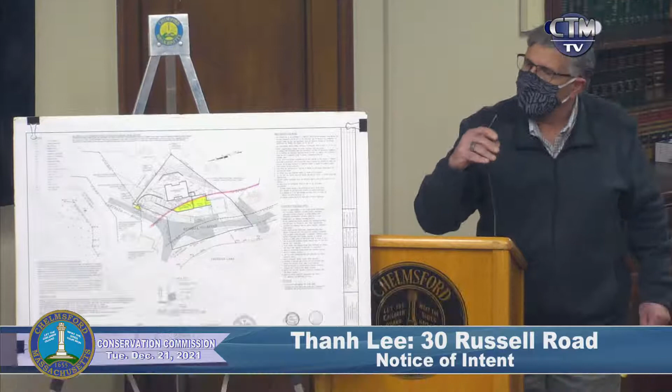Good evening, Mr. Chairman and Commissioners. My name is Hushman Afshar from Taj Engineering LLC. As it was pointed out, the heavy line is the property line. As you can see, a good portion of Russell Road lies within the property of the applicant, and the entire site is disturbed in the sense that the existing house is between the 50

Anyone in the audience need a copy of the plans?

and 100-foot buffer zone. The highlighted yellow area is the only area of the proposed improvements on the property that lies within the 100-foot buffer. As you can see, the pink line is the 100-foot buffer, and that about 1,000 square foot is actually within the 100-foot buffer line.

This is the house, this is the garage, this is the breezeway, and this is the driveway. We are proposing an underground leaching chamber, retention and infiltration, right here at the end of the driveway. There is a trench drain right here that collects any surface runoff from the driveway. And there is another system right here in front of the garage in the paved apron that collects the roof drains, and these systems are retention infiltration systems.

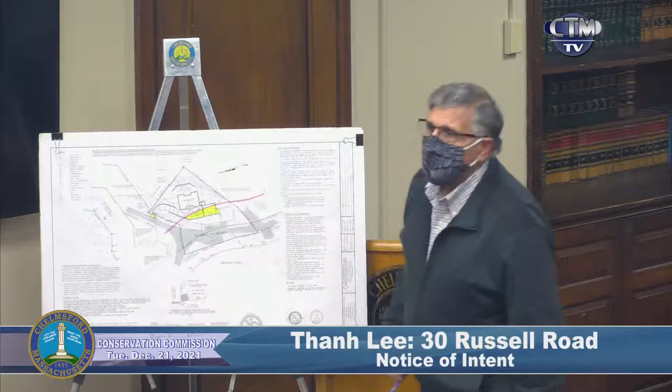Okay. And as you can see, the direction of the flow is towards the applicant's property. It's deviated from the abutter, in this direction. Well, in that same general area, the way the contour is shown, there's a swale, the little U-shaped outline of the contour. Correct, it comes here, but then this contour is coming this way. Right now, the existing contours are in this direction, as you can see in the background. This way, it's going uphill. The way I'm looking at it, it looks like it's downhill, so you may just want to reevaluate that and take a closer look at that.

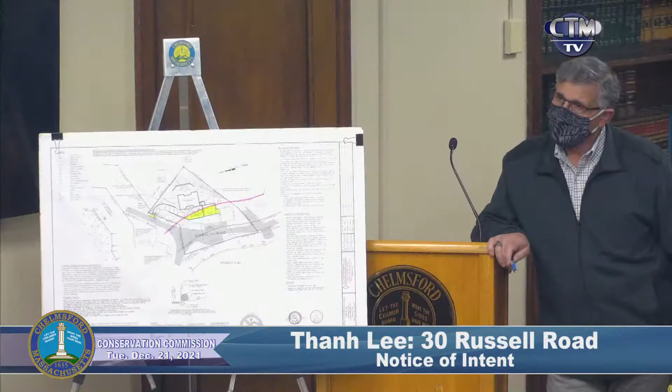And then I would also have some concerns over the actual retaining wall. It looks like it's a two-tiered retaining wall. Are you talking about the proposed one or the ones that? The retaining walls in the front. Not the one that's on site? No. Well, it looks like there's an existing, maybe a stone wall along the front, and then there's a proposed one behind that. You're talking about the new ones? I would be concerned with both of them. Okay.

Just so we can know for next time, what would be the concern about the retaining wall? I would just be concerned about the actual structural ability of that retaining wall to function. You mean the ones within the buffer zone? Just all the retaining walls on site. My experience is that if you have a retaining wall that's close to another retaining wall, there's potential for that to have an impact on that existing wall.

So just from a structural point of view, I would be concerned. I'm sure that the building department would require the stamped plans, properly structurally designed, which has to happen. Otherwise, the applicant will not get his construction permit. Anything else, Chris? I think that's all I have for now. All right, very good. Moving along.

Mr. McLaughlin? In the letter you read, Chris, the authors of the letter said there's activity happening on the site presently, is that correct? I think they said that in the letter. Are they here tonight by any chance? Yeah, it's referring to the retaining wall he put up. Hold on, Dave, let's keep this under control. What's your name and address, please? My name's Emily Madden, I'm at 16 Russell Road. Okay, good. So is there activity on the site presently? Not right now. I'm sorry if that was written. Okay, thank you.

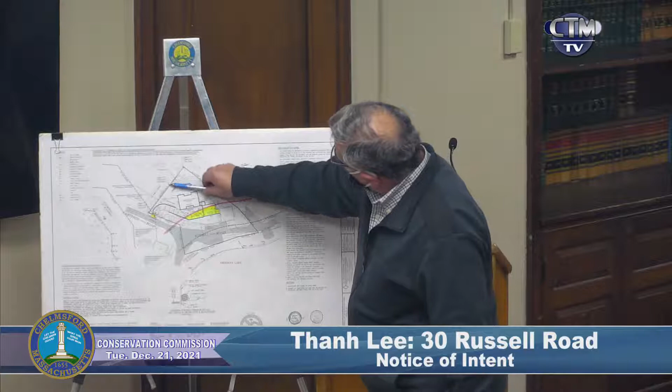The existing runoff comes just down the hill as it is. Once the house is built, where is the runoff going to go? From behind the house, anything behind this proposed retaining wall, part of it comes through the soil, and part of it comes over the wall onto the driveway into this leaching chamber. So none or very little of it is going into the chambers? Well, this part is going into the chamber, yes, and this part remains as it is right now. All right, during construction, how are you going to prevent erosion back there?

Well, you're proposing the conventional erosion control. I read your erosion control, but it didn't address to my satisfaction how you are going to prevent what could possibly be significant erosion during construction behind the house. And I don't know where that runoff is going to go. You said it was going to go to those two chambers. I'm not so sure it will.

Well, it's going to go from the roof, from this backyard; all the roofs are going here, and the rest of it follows the pre-construction flow pattern. During the construction, we have silt fence all around. Have you made any calculations as to how much runoff from that site will go into those two chambers? Yes, we have. Are they in your package? They're not in the package, no. Could we see them? Yes.

Okay. Mr. Chairman, if I may. Yes, Chris. I think what Dave is saying, and correct me if I'm wrong, Dave, is during construction, the back of the area will be graded, so there'll be construction equipment, and they'll be regrading the slope, so there'll be disturbed soil. What happens if there's a rain event and the slope starts failing, or gets inundated with rainwater?

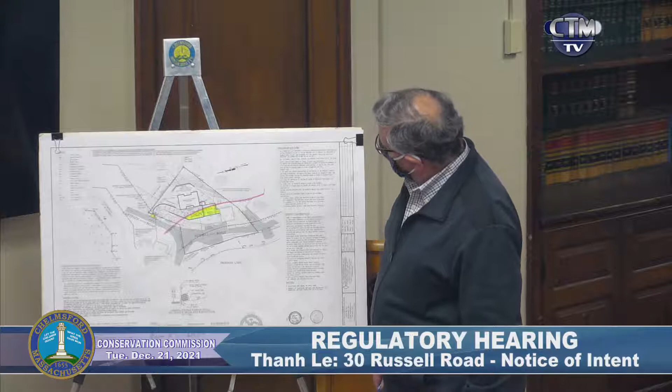There's going to be some runoff that goes to the northwest, and that's the wetlands that we've had some concern about over the years. That's the wetlands behind Russell. It's not Freeman Lake. You mean this one here, yeah. And Carpath, as I understand it, is not an accepted street and does not have storm drains in the street. Is that correct? I don't believe so. Russell is not an accepted street, and it does not have storm drains either. Correct. So the only runoff from this site being collected is in those two chambers. Everything else is either going to flow over Carpath or onto Russell.

Is that correct? That's what's happening right now. We are improving the situation. That doesn't mean it's okay, just because it's happening now. I'm trying to understand how significantly better this project is going to make that neighborhood. That's what I want to understand. I'm not hearing it yet, that's all. That's all I had right now, Chris. All right, Dave.

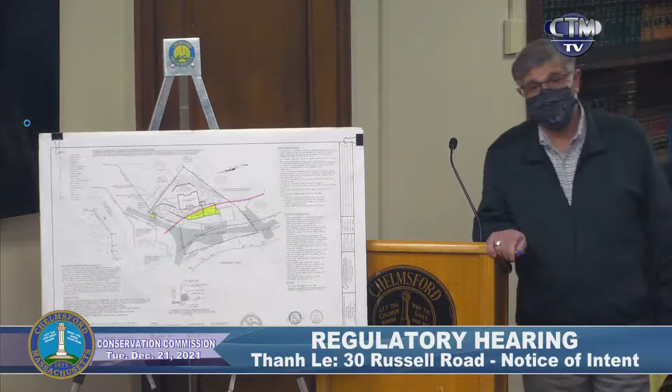Moving on. Bill? Yeah, I agree with Chris about the test pit for that driveway drain. Also, I had a question. This Russell Road is on the property, right? It cuts through this property. Yes. Now, is there any intention to remove any of the hot top that's within the 30-foot no impervious? There's a little area of an apron down by the water. No. You have no intention to remove any of that?

Down at the bottom, the little apron? You mean here? Right there. See where the apron goes down towards the water? Yeah, no. We are not touching any existing pavement. So the hot top's going to remain within the 30 feet? Yeah, I don't think we can unless we go through all kinds of process with DPW. But right now, to the best of my knowledge, there is no intention to touch any of the existing pavement.

Does the town plow that, or who plows that? Town plows the right of way, but not that little parking area. But, Bill, we'd be happy to remove that bump out.

And I was just asking the question. You know, if the commission would like us to take that out and put some landscaping there and create some less impervious soil as part of this project, we'd be happy to do that. Okay. And I also agree, because you're going to be doing work behind the house.

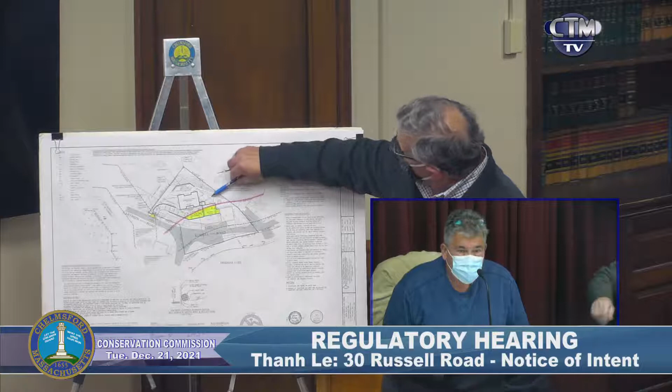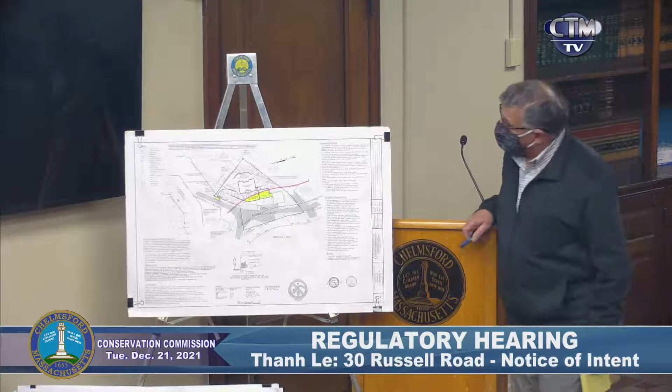We can put another underground system here, if the commission so desires, that's fine. The idea was to continue the swale, come through these few feet, and join the existing contours that go this way. There is some sort of swale here, as you can see from the contours. We can either continue that, or we can put another system here. That's fine, do what you have to remedy it, we're not here to design. No, we will. But that was the intent, to bring the swale along and down to where it goes right now. But it hasn't been addressed until we just now addressed it.

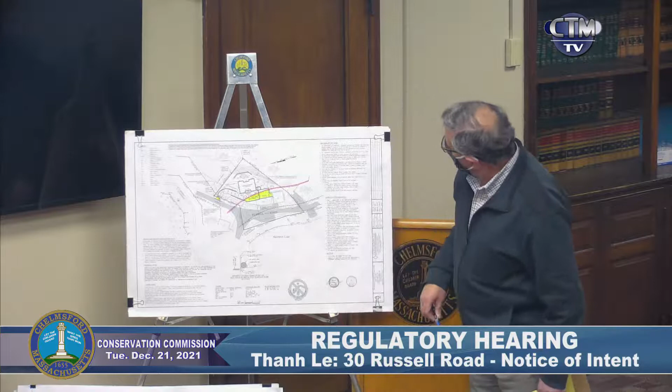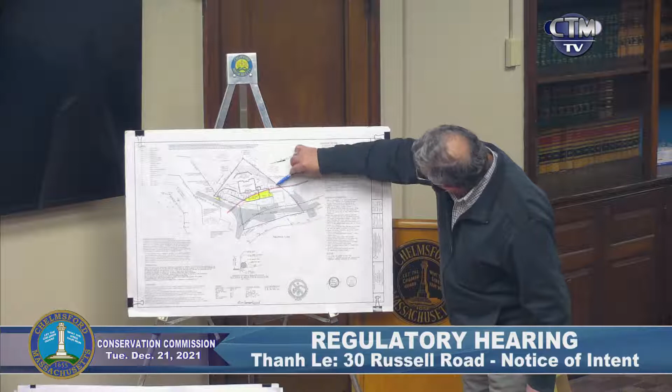Well, these contours come this way and down, and this is existing swale. So once it passes through this corner, it gets back into this swale. I'm all set, thank you.

Thanks, Mark. Carl? The only thing I'm trying to remember is when we talked last time, we talked about trees. Were the trees removed already on this site? There was one dead tree within the 100-foot buffer that was removed, I think, in 2018. Okay, and are any more planned to be removed within the 100-foot buffer? No. I think we've covered everything. Thanks, Carl. All right, John?

These retaining walls, what are they gonna be built with? Are they gonna be built like the front retaining wall, which is boulders, or a regular system? They will be designed as cast-in-place concrete or landscape block retaining walls. Landscape block, which is designed for retaining walls. They go up to like 50. Oh, I know how high they go up. So either or, but it will not be a stone wall, no.

So mud and stuff like that isn't gonna be able to get through. No. And you're sure these retaining walls are gonna be enough to hold back everything? They will be, yes, they will be designed accordingly, just like any other retaining wall. Yeah, okay.

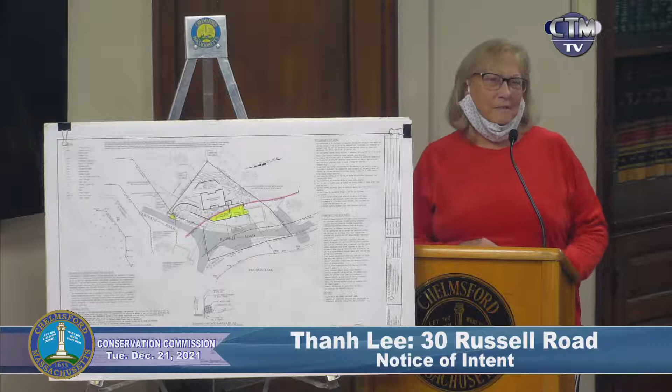So I just wanted to make sure that you've all been out there and see our situation. You need to see the bigger picture. It's not just that one lot. It's our quality of life. That's all. Thank you. Thank you, Ms. Clancy. Anyone else wish to ask questions of the applicant or address the commission?

All right, well, today was our opening meeting for the commission. Does a member of the commission want to take some sort of action tonight for next steps? I think we asked the applicant to provide us with some additional information.

My primary concern with this proposal is I do not feel the applicant has adequately shown me how the runoff from that hill is going to be managed and contained during construction and post-construction. What I don't want, and it gets to what this lady just spoke to, is that street's in pretty bad shape, and this project should try to keep water off of Russell Road to the extent that it can. Certainly should not put more water onto it.

I'm also not quite sure, because it wasn't addressed, does the runoff go to the wetlands on the other side of Car Path? I think the question about the elevation of the chamber by the driveway is an important one. We don't want that chamber to be below the water level of Freeman Lake. So it'd be my recommendation that we give the applicant an opportunity to answer our questions.

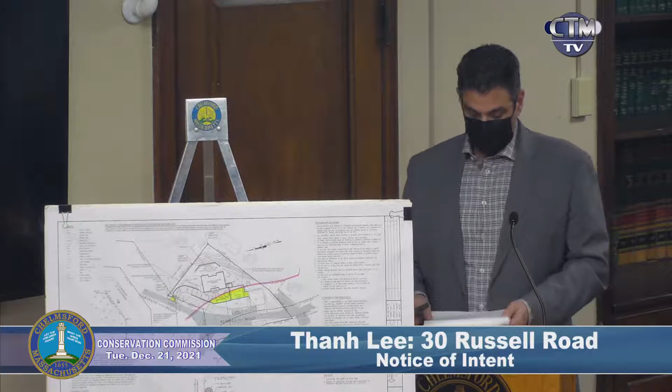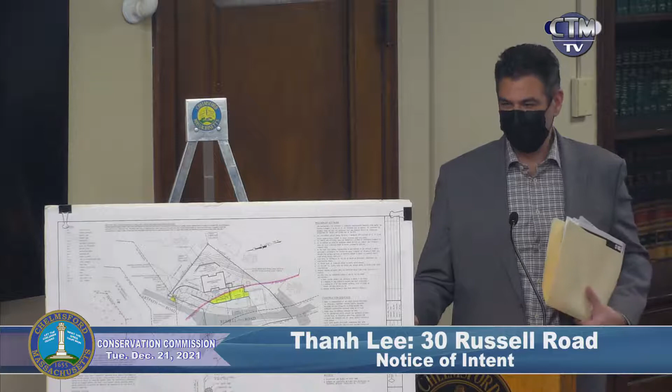Very good. So if I could have a motion then from the commission to continue. Mr. Iliopoulos, we're meeting January 4th and January 18th. I don't know if you have a preference on dates for getting that information? Yes, sir. Why don't we, if you wouldn't mind, could we go with the 4th? We'll see how much time we need to update the plans to get them to you with the holidays. If we need more time, we could always reach out and ask for a continuance to the 18th, if that would be all right. Exactly. Okay. I know it's a tough time of year, so maybe the 18th will be more realistic, but we'll try for the 4th for now.

All right, so could we have a motion to continue the hearing? I so move we continue this hearing until January 4th. Motion by Mr. McLaughlin, seconded. So it's moved and seconded, right? Well, yes, we just had Mark add the second on that. Okay. So just discussion on the motion, Mr. Chairman? Sure. What I can do, if the commission wants, is draft a proposed set of pre-construction conditions to address some of the concerns that we have. I think that's a great idea. It could be beneficial. I can have those ready for the commission's review at the next meeting.

Yeah, Bill? Is there any desire by the board to remove any of that hot top that's in that apron out front, or leave it the way it is? I thought that might be a good idea, is my off-the-cuff feeling. Except doesn't Russell Road go to another house? Yeah, but there's a couple of parts. We own part of Russell Road, but there's also an adjacent parking area that's between Russell Road and the pond, owned by the applicant. That cut out might help some of the runoff situation. Well, if it gets rid of some impervious material, yeah. It might help. We're happy to incorporate that into the plan. It's just my thoughts, I don't know if anybody else supports that, but I think it might help.

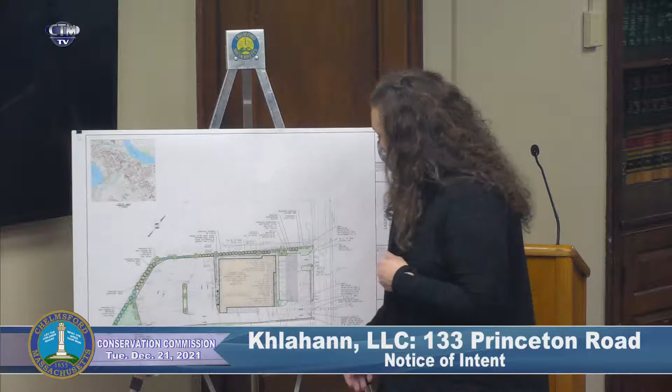So we had one review from the town engineer during planning board. We already have our planning board approval. We wanted to work with Christina and make sure that her drainage questions were answered before we filed with you. So we were able to take her letter, prepare a package that was submitted to this board and to her.

What we found out last week, and this might be a good thing for the commission to know, is that any kind of porous pavement requires a special permit from the planning board. So we had switched over to use kind of an LID measure, some porous pavement in the back here to accomplish some of our drainage solutions. We found out that we would have to completely go back to planning board and refile and re-notify so that we could use porous pavement. So we said forget it and switched it out and made it work without it.

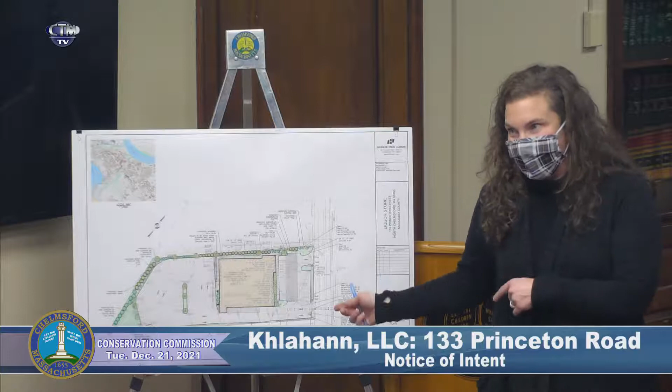They wouldn't give you an amendment? No, because it's a new special permit, we would have to re-advertise. That's ridiculous. I know. So that portion of the bylaw was just amended, but they didn't take out the special permit part. And I actually had never seen it in 25 years, and Christina and Evan weren't really sure. Christina found it, and Evan was like, well, I guess it's written down, so I guess you'd have to come back. So we made it work without that.

We sent in a new plan to Christina yesterday. I didn't see anything from her today. She had a bunch of meetings today. Were you able to talk to her, David, at all? No. Okay. I talked to her this morning. She was going to try to get to it.

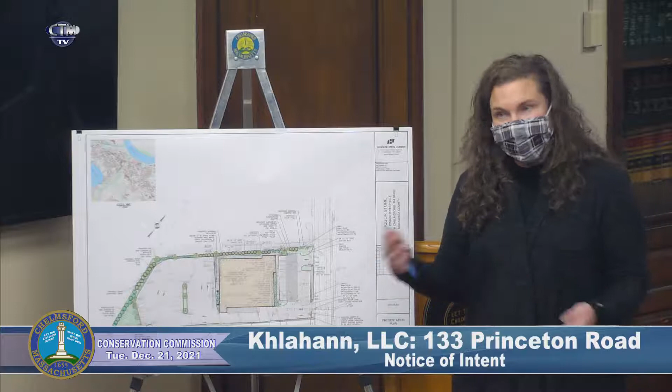None of it really had to do with the floodplain mitigation. That was all approved from her in her previous letter. We're just working out the final details to make sure with the new stormwater management for Chelmsford, we have to have 90% TSS removal and 60% total phosphorus removal. And we had that. We were just making some little tweaks here and there to make sure she's satisfied. So with that, that's a pretty quick overview. If you have any questions.

I know, David, you asked me about the 100-year flood. Before I close, I did find the profiles for Stony Brook. I have the floodplain map with me, I think it appears around 99, 99.5, which would just touch this back corner, which is super surprising based on what we saw when we were out there, that it would ever come up that high. But that's the profile that I could find for the flood insurance study that was done for Middlesex County. I couldn't find the section of Cold Springs Brook at all, so I don't know if this section was even studied. But I just wanted to.

Okay, well, thank you for checking on that. David and I did go out on Monday and walk the site also. Well, thanks, Katie. David, that kind of leads into your comments. I know you were out there. Can you give us a little bit of a report? Yes. So a couple of minor questions did occur to me after our site visit, Katie.

So this doesn't require a SWPPP, right? We would do one, yeah, because it's new construction that's over 40,000 square feet, so we would do a SWPPP for this. Oh, okay, so this is that large? Yeah. Wow. That includes the parking lot, right? Correct. Because the building's not that big.

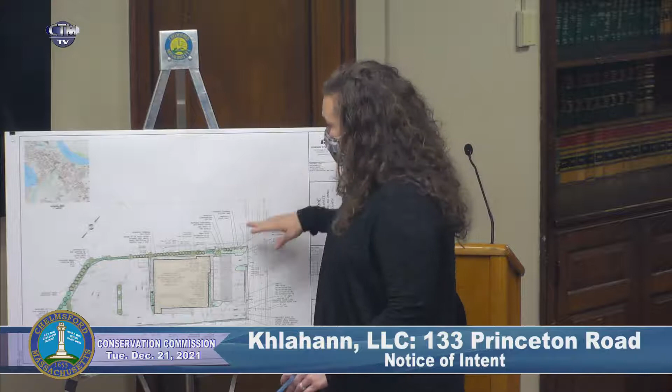And when I was just looking at the site, we usually have this really dark line around the entire area. It really is gonna need to be at the limit of work. Everything is pretty much downhill from us, so we will have to, and I can add that to the plan. Yes, if you would please do that. We did show it on the detail sheet, but we didn't show a location, but it would be essentially the entire property line at the limit.

Good. So are you awaiting further revised plans, or you're going to be preparing the revised plans? No, they're done and they're into Christina. Oh, okay. Based on her last comment letter, and we had responded to the comments and provided you with a copy of that yesterday when we were dropping them off to her at the same time. But you haven't submitted the final plans yet, correct? Oh, I think those were the final. I think those are the final plans.

Oh, okay, so the date on these is 12/20? Right. So these are the final plans? Mhm. Well, we hope so. Okay. Well, this is the third iteration with her. She probably wouldn't have any more questions, would she? I hope so. I was really hoping she would get to it today, but this week is really hard, so she hadn't.

I'd be happy if the commission were okay to have it as a condition of approval to make sure she's okay with it. She has to be okay with it before we print Mylars for the planning board. And there's certainly no more disturbance that we can do. So I personally don't see any reason at this point to keep the hearing open. Just my opinion. All right, good. Well, let's see if the commission has some questions.

Chris, anything? No, I think that Christina's looking at the pre and post and the drainage. I'm more than comfortable with that. You'd said that you provided floodplain calcs too, and she signed off on those. So I'm good. All right, excellent. Dave, anything? Where is the floodplain line?

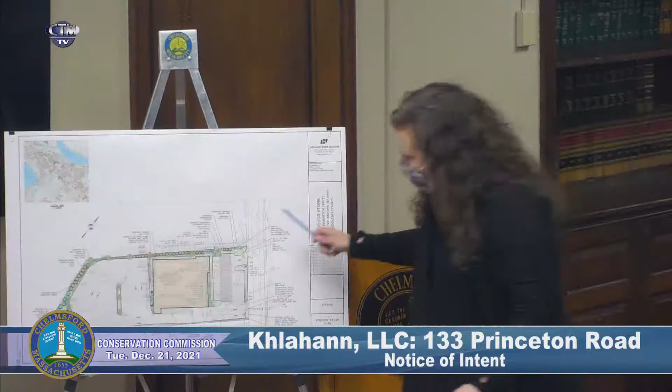So it runs through the 103 contour, which now basically does this. So it's a straight line through the back of the building? Well, no, it follows the building because the building's enclosed, so it can't get into the building. No, I understand, but if the building weren't there, where would the floodplain line be? It would go straight across. Yeah, that's what I want, okay. But you're reworking the 103 contour as part of the project. That's correct.

So, right, what we've done is given you the foot-by-foot volumes from pre to post, from I believe it's the 98 contour to the 103, so that you can see the volumes between each foot-to-foot interval to prove to you that we're keeping the same, or actually it's more volume in the post than the pre. So the 103 and essentially the floodplain elevation is moving closer to the road, right? Only on our site in this section here, because we had to fill this side a little bit.

And the building's a little bit wider than the existing building that's there today, footprint wise. So we manipulated, which we have to do now because you can't use structural measures to provide flood volume storage. So you basically have to manipulate the ground to get your flood storage. So that's what we did within our site. And that confused me at first. It's a little bit unusual.

Good. Dave, anything more? In the erosion control plan, you make a reference to the disturbed material that's going to be removed. How will disturbed material be deemed unsuitable? I don't know what unsuitable material is. Well, it depends what you're using it for. There's some unsuitable material in the front here above the natural grade that was filled. That material will most likely be unsuitable for the parking lot. So it's end use, not in absolute terms, unsuitable? That's correct. Like under the building too. What's the demolition plan?

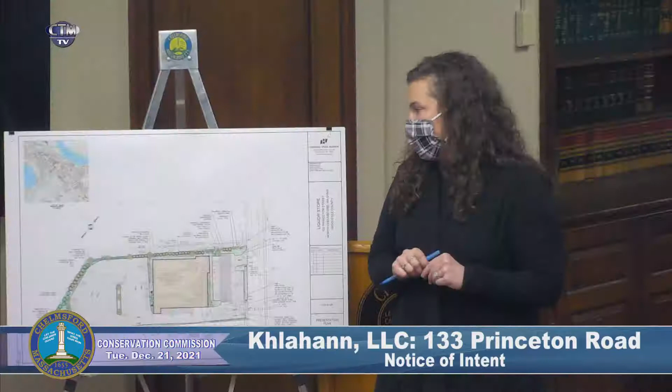You've got a substantial amount of landscaping on this site, and there's a list of trees that are 2.5 to 3 inches when you plant them. How big do those trees grow? Do they end up being 20-footers or 30-footers? Anybody know? What's the species? There's an Acer maple, they can be small or big. There are so many hybrids now. I can tell you that Nancy Arroway reviewed it and went back and forth with our landscape architect as to the appropriateness and the size of each of the plants on the drawing.

Where I'm coming from, Katie, is you're removing 8 trees, which are probably lousy trees, from the site. I'd like to see good trees replace them, to have the same, if not a better, impact on the atmosphere, and that's a function of how big a tree grows as much as any. I don't know off the top of my head, but I can tell you the species. That's okay. I wouldn't propose any hemlocks or Norway maples. Those aren't allowed anymore.

In one of Christina's first or second letters to you, she refers to ponds on the site. What is she referring to? Here and here. Are they literally ponds of water that exist year-round? No, this is an infiltration pond. So she's not referring to the natural site condition. No, this we had in HydroCAD as a swale, and she wanted it modeled as a pond.

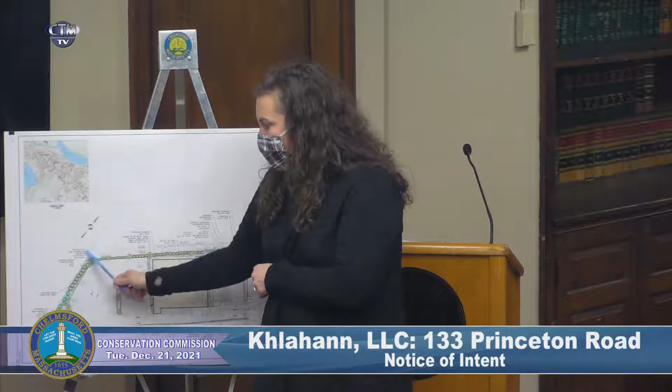It's outside of the water table, and this doesn't, well, it can infiltrate, but it's not called an infiltration practice because it's too close to the property line. And so all the drainage from the site is going to where? The building in the front goes to here, underneath, and then the pavement from basically here along the side of the building, and this pavement goes into these two practices.

Where's the water table in the cellar? How fast do you hit water, do you know? Well, we tested back here, and it was about 26 inches, I believe. Okay, but you're having a full cellar in the building? Full cellar in the building, but it basically is at that elevation, about a foot to 2 feet below grade.

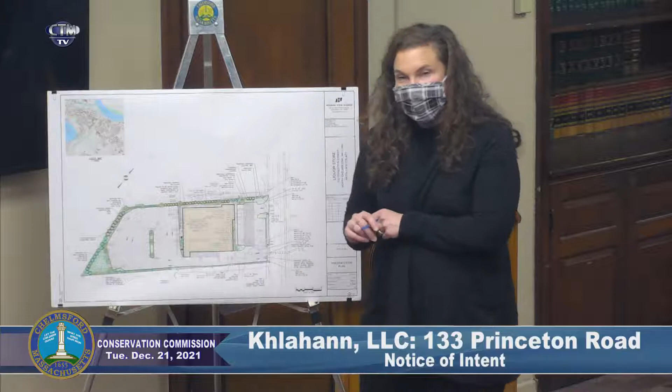One last question, I'm sorry. DPW said they didn't want sidewalks. Right, the Vinal Square Committee did. And why did DPW not want a sidewalk? MassDOT's gonna require us to put sidewalks. It's not a conservation question. I know. DPW, the thought process was that they'd take the money and put sidewalks somewhere where they're more needed. But the Vinal Square Committee came back and said, no, we want sidewalks. And MassDOT's not gonna let us get away without putting in sidewalks. Good. So the sidewalk's back. That's all I had, Chris. Good, I'm glad the sidewalk's back.

Bill? Do you have dewatering when you do that cellar? I don't have a dewatering plan, but we would include that in the SWPPP. That's gonna be a big improvement for what's there. Oh, yeah. Anything is. No, that was the only question I had, about dewatering when you did the cellar.

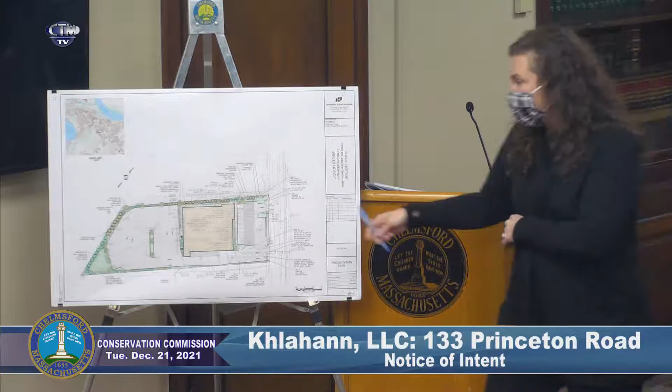So you're saying, Katie, it's more of a crawl space, this cellar? No, it is a full cellar, but basically it's gonna be half buried in the back, so that the floodwaters can't get into the building. Oh, okay. But you're still gonna have to dewater, so you need a plan. There'll probably need to be some sort of dewatering, absolutely, for the footings. But we'll include that in the SWPPP. Okay. Very good. Good, Mark?

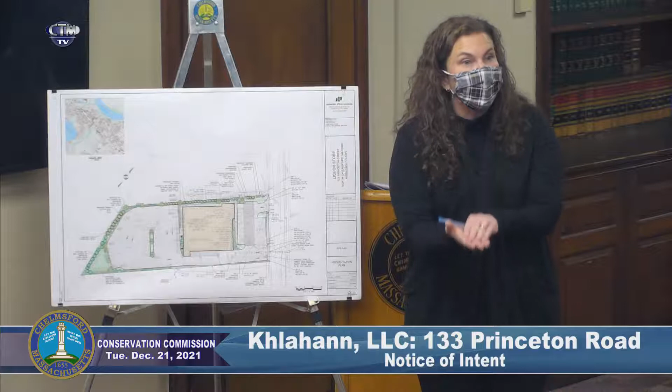I'm still confused about this whole area. This site is probably 95% impervious. Fair number, 93, 95. But you're taking floodplain area and paving it. We're not replicating anything. We're replicating the volume, which is what's required. We're providing actually more volume than exists there today within the floodplain. So when the lot floods, it has more storage on the lot than the existing condition. And that's all done on the railroad property? No, it's here. It's paved, isn't it? Yeah, but it's volume. It has to do with elevations. It does not have to do with pervious, impervious.

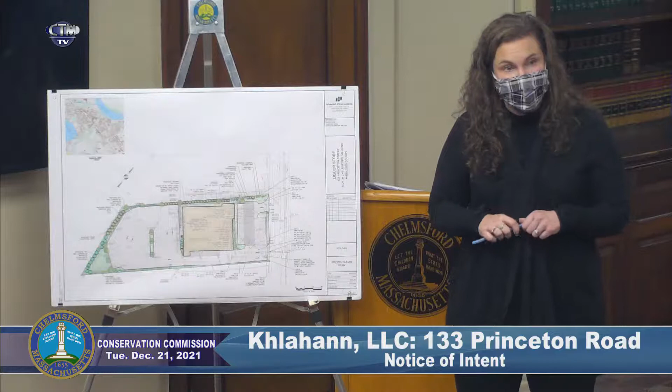You had to cut and fill different areas? That's correct. And what we're doing is we're taking the infiltration that happens in the back now, and we're putting all the water into the ground up here, where it's further away from the water table. So there's also increased infiltration on the site over the existing condition too. It is standard practice. Okay. But it is a little confusing if you're not used to seeing it, yeah.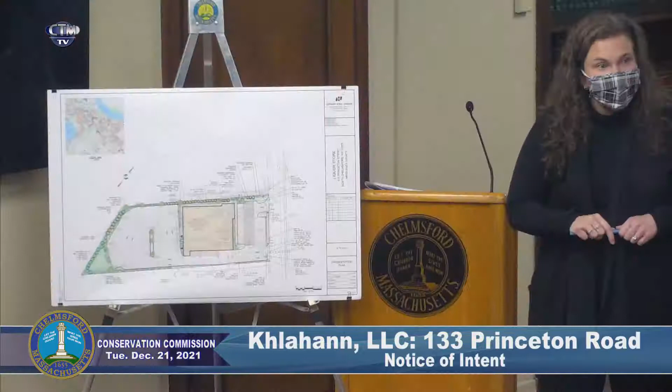I guess the other thing is, we really encourage trees. Really put a lot of emphasis on that. Anything they can add to this, I'd like to see. And native, if we could. I can double check on the native, but as you can see, we've put plants every possible place we can. There's a ton of shrubs on it. Maybe you could put some trees instead of shrubs, anywhere where they could fit. That whole side is chock full of trees. These are all trees, there's trees here in the center island. That would be really nice. We'll do as much as we can. Thank you. They can buy them from Mahoney's, right next door. All right, good. Thanks, Mark.

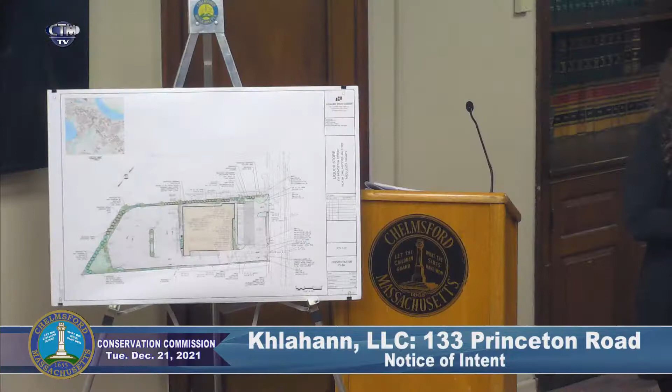Carl? So is the amount of parking determined by the need of the owner or by the planning board requirement? Well, it starts with zoning. Zoning specifies a certain amount of parking. This is a little bit of a strange use if you try to compare apples to apples with zoning, because we have the retail floor, and then the other two floors are really just storage. So we asked for a huge reduction from the planning board in parking, to the point where I think we are, let me look at the cover.

We would have been required per zoning to have 87 spaces, and we have 52. So it's already down. We brought it down because that was based on the specific use of the store, because he knows his employees; these warehouse areas don't need employees. The employees are going to be on the retail floor, where it's a retail use. So we basically provided enough for the retail use, and those employees will go up and down the stairs to get product.

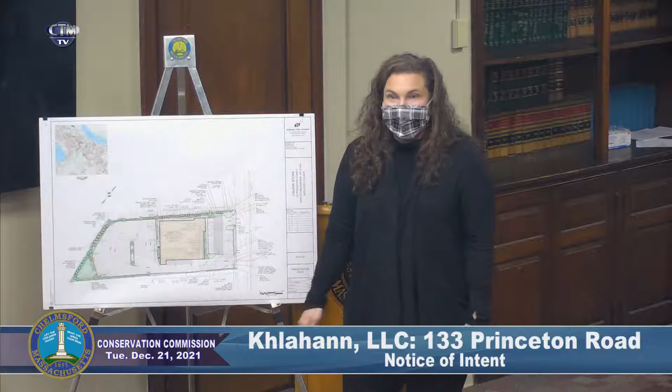I'm just looking at the back and the front, but that's a lot of space in the back for parking. You know what, we tried. The other aspect of this is it does look like a lot of pavement. We tried 800 different ways of getting a fire truck around there and a loading truck. We need to have the ability to back in a tractor trailer truck to bring in product, and we also need to have the ability for the fire department to get around. So we tried and tried to slim this up.

That's a good question. When the truck's at the loading dock, how does the fire engine get in? This is actually 20 feet here. So there's enough room? Yeah, and they reviewed it as part of planning board, but we really tried to make this as little as possible, but we need all that for the turning movements. Okay.

I looked at it today, I was driving by and I said, ooh, that's tonight. I pulled in. Did you get any nails in the tires? No, but I'm really glad something's being done. It's a disaster. Has been forever.

How long ago was it active as a site? Any idea? 20 years? The gentleman that's using it right now has been parking cars over there for the last couple of years, but I heard maybe the 80s was the last time it was used, I don't know. Railroad salvage. It was railroad salvage, and they had a little store in there, you could buy groceries, canned goods, appliances. I remember going into that store. '93. I don't remember it in my lifetime.

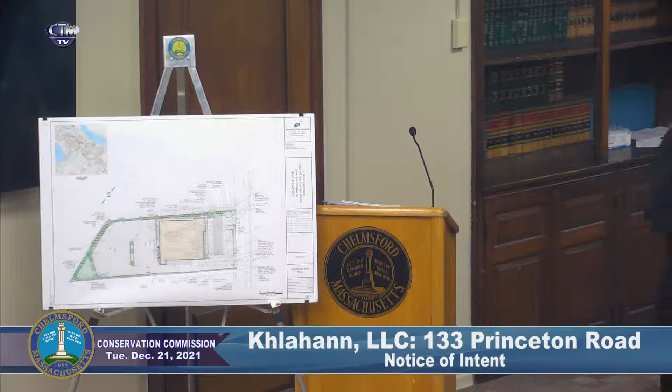No, okay, I'm good, thanks. All right, John? Katie, all the roof drains are going to the front. Okay, how big's that area? The roof? No, the system you're putting in? It ends up being 25 by almost 100. Okay. And they're the arches, so there's more volume in them than just typical pipe and stone. Okay, great. Good, John? I'm good.

Mark, back to you. Yeah, I just had a question on snow storage. Not a lot, it's going to have to go off-site. They're going to have to store it and get it out of there. Okay. And I'd like to use something that wasn't sodium on the driveway. Do you think that area in the back would clean the water before it went into the wetlands if you use the salt?

Well, actually, there's no devices that capture salt. There's no devices that treat salt at this point. So the devices that we've proposed basically capture floatables. Out front, this will go into infiltration. Back here, it'll go into infiltration, but most of the BMPs really just capture sand, silt, sediments, leaves, trash. Are there any alternatives you can use on the driveways as opposed to salt? Yeah, I'm sure there are. We're not in any kind of buffer zone to the river. No, I know. It's just floodplain, when the water comes up that high.

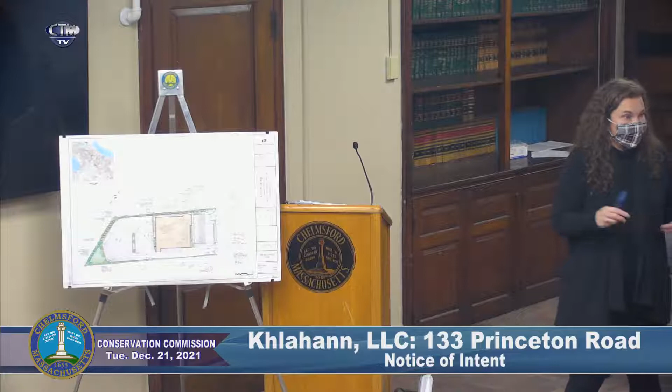And North Chelmsford Water's okay with everything? They commented on our water connections. And he didn't have any other concerns? No, there weren't any concerns about filtration or anything like that. There were comments on the water connections. Okay. Look for PFAS when you dig it up. Yeah, exactly. Don't look at people.

All right, this is a public hearing. Does anybody from the public have any questions or comments for us? No public input. All right, the applicant is in with a notice of intent, so we're looking at standard order of conditions with some special conditions. I think one I heard was no salt, and then, Mr. Coon, did you have something for conditions? About the SWPPP, yes, and submitting reports. And the snow is taken off-site, so we need the snow to be off-site, okay?

So we have a motion then for order of conditions? I so move with the three additional conditions. Okay, and a second on that? Second. All right, Bill on the second. All those in favor? Aye. Any opposed? Unanimous. Thank you very much, Katie. Thank you all very much.

All right, that takes us through our regulatory hearings for this evening. Now we go on to our discussion items, and first up we have an update on Oddfellows. Before we do that, could I just make a comment? The material that David provided us electronically is fantastic. We've never been able to get material electronically, believe it or not. It's very helpful. Don't have to wait till the last minute. Oh, good to hear that. Thank you. And we have some paperwork making its way down for signature. So back on tonight's agenda, we have an update on Oddfellows from our agent. Mr. Coons, can you give us an update?